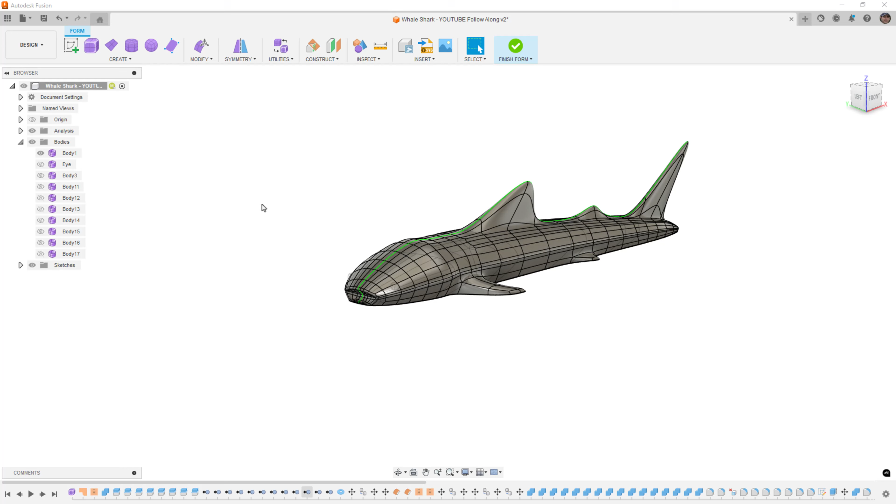The mouth, for example, is a very tricky area we're going to have to work on. We can see the way the edge flow is working here, and we're going to have to spend a lot of time on that. But let's go ahead and talk about the overall process, how we start the design, how we add a little more detail, and hopefully by the end you'll have a bit more confidence to try to model stuff like this on your own.

So first things first, we need to start a new design. We're going to start a new freeform model, and the basis of any new freeform model comes down to your choice of the primitive, or the starting shape.

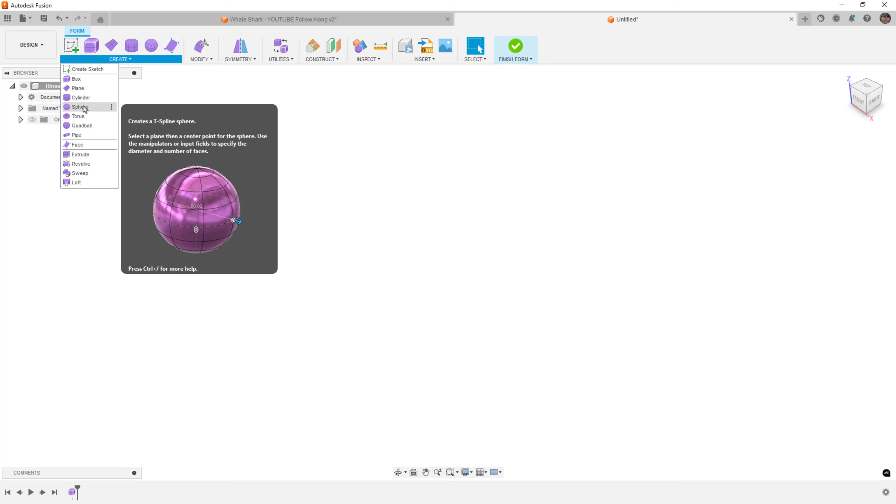In some cases we might go for a sphere, like if I'm modeling a pumpkin or an apple, because the point at the top where everything comes together isn't a big deal - it'll be covered up by a stem or something. But generally, when we have a model where all these edges converge to a single point, that's something we want to avoid unless the model really calls for it.

For something like a helmet, which we've done before, a Quadball is a great option. When we're talking about car modeling, we generally start with either a face or a plane. But for the case of the whale shark, we're going to start with a cylinder.

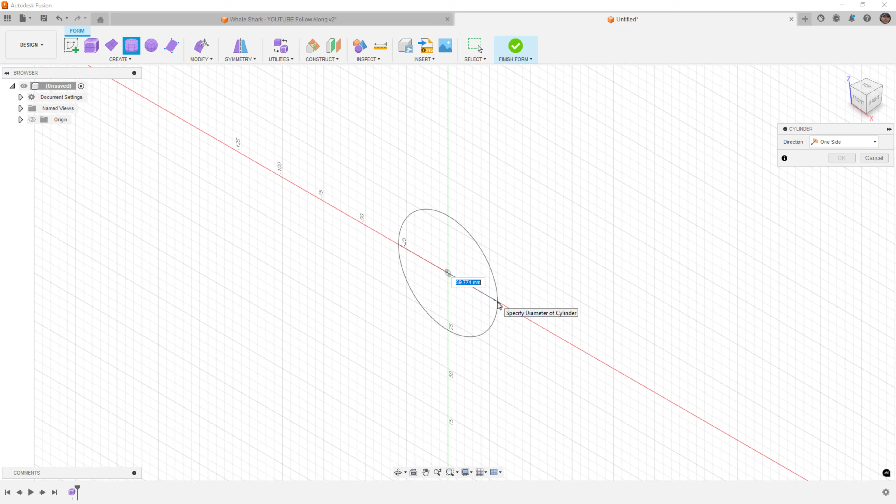So we're going to begin by sketching on the front plane and just figure out about how big you want to make this thing. I'm going to start with about 60 millimeters. I'm going to change the height faces down to 1, and I'm going to leave the diameter faces at 8 for now. We're going to say OK.

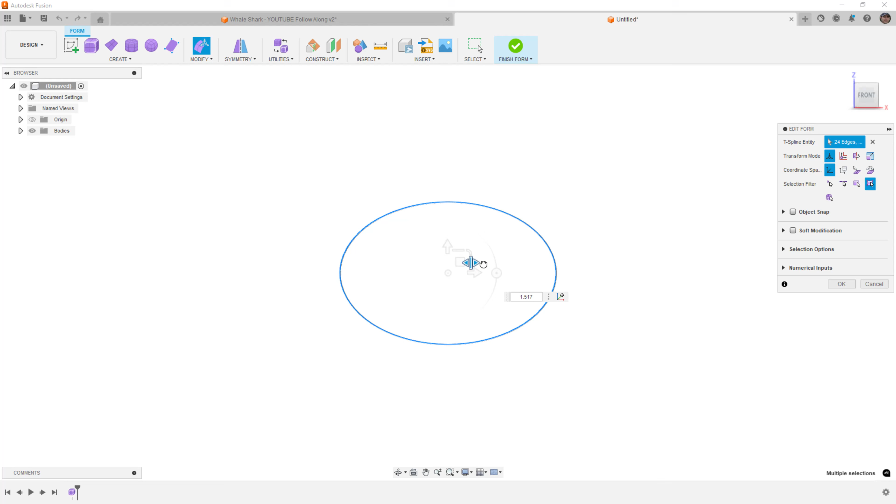From the front, I'm going to select everything, and I want to begin by scaling it outward. A whale shark is pretty wide and low, so we're going to stretch it out roughly 1.6 scale, and then we're going to say OK. So this is the basis, the starting point for us.

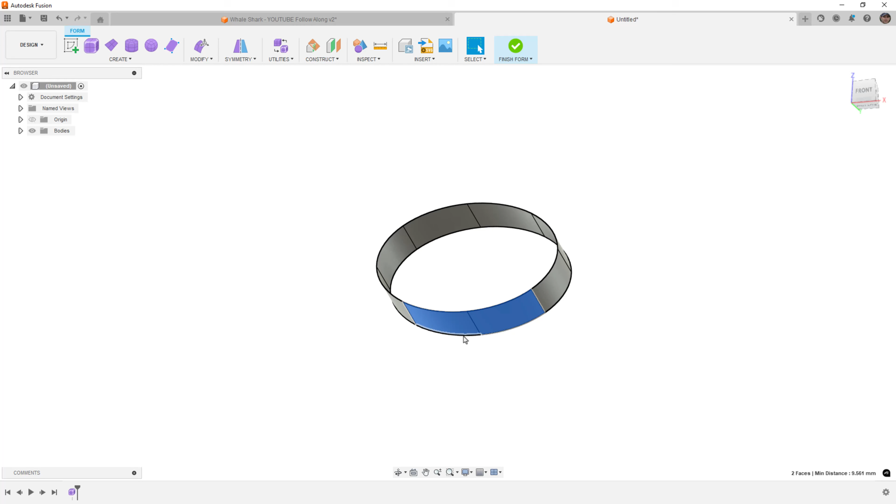Now, this design originally is intended to be 3D printed, so I needed to make sure it had a flat base. The best way to do that is to delete the number of faces you want to get rid of and then just fill it back in with something.

This can be a bridge - we can use the face tool and snap to those vertices. Bridge in our case is going to be straightforward. I just need to make sure the number of faces leaves me with one line in the middle so I can use symmetry. I'm also going to select keep creases, which will crease those edges for me, keeping that bottom flat.

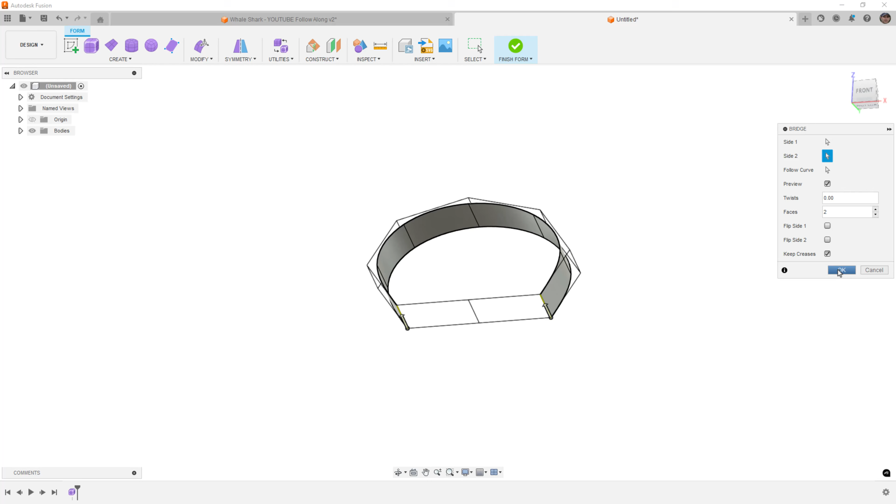Now we can add symmetry - just pick one side and then the other, and make sure we have a green line at the top and the bottom. So this is the basic shape. We're pretty much done at this point, so let's go ahead and add a little bit more detail.

I'm going to start by selecting this back edge, go to Modify, hold down Alt, and drag it all the way back wherever I think I need the tail. If you let go of Alt and press it again, it's going to add another edge for us, and that's okay. The next thing we need to do is move our pivot point.

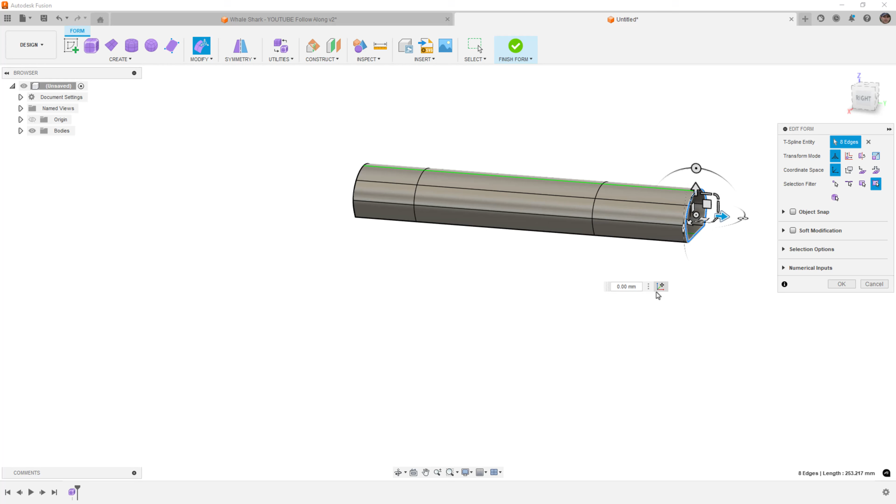So we're going to use the Move Pivot Point option, move it down to the bottom, and then we want to scale this down.

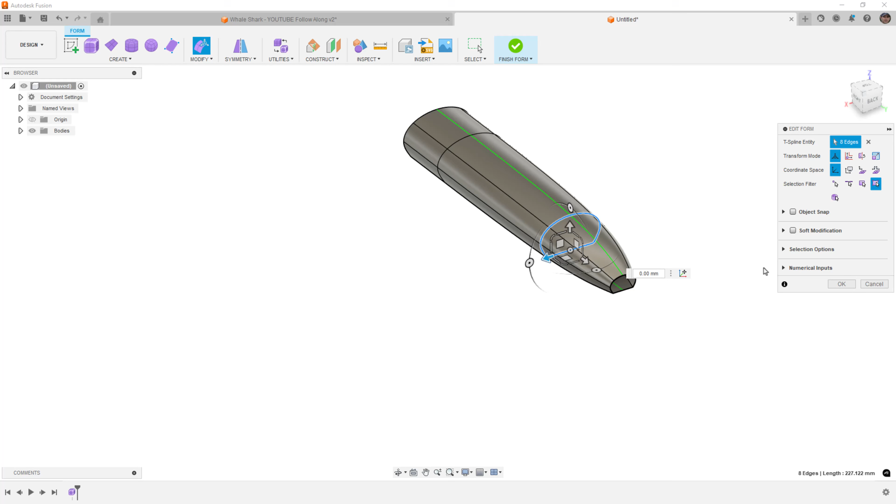So it's going to taper toward the back. Then we're going to double click on this edge and reset that pivot point. It needs to be at the bottom center. Actually, it doesn't have to be in the center. If we're only scaling vertically, it just needs to be on the bottom. If we're scaling horizontally, you want to make sure it's in the center so that both sides scale inward equally. And then we'll scale this down as well.

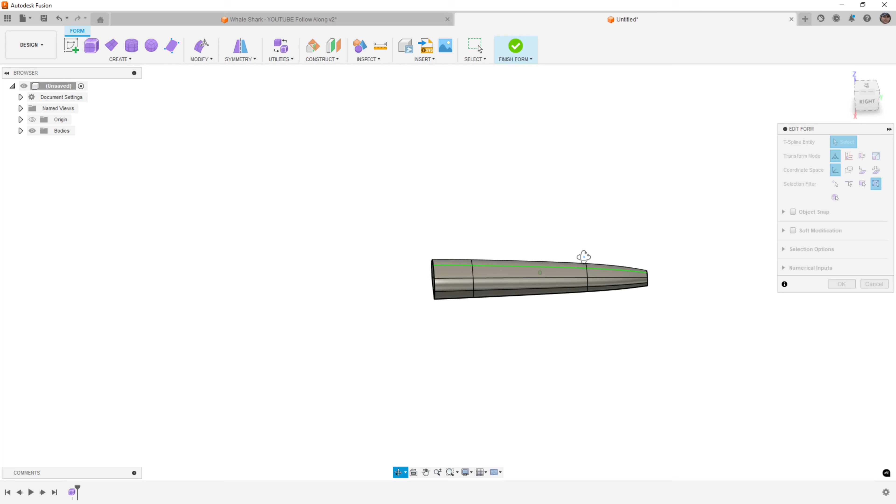We basically just want a transition of the body. If you want it to be a little bit wider, you can always play around with the scale horizontally and vertically, so take a look at the side view. If you want it to be a little bit taller, you can pull that up, but I think that looks pretty good.

Now with a whale shark, actually the head sort of goes out and then comes back in. So if we take a look at this from, let's say, a top view, you can see at this section here, which is kind of where we started, it goes out and then tapers in, and at the eyes it tapers in a bit more, or at least that's how I modeled it.

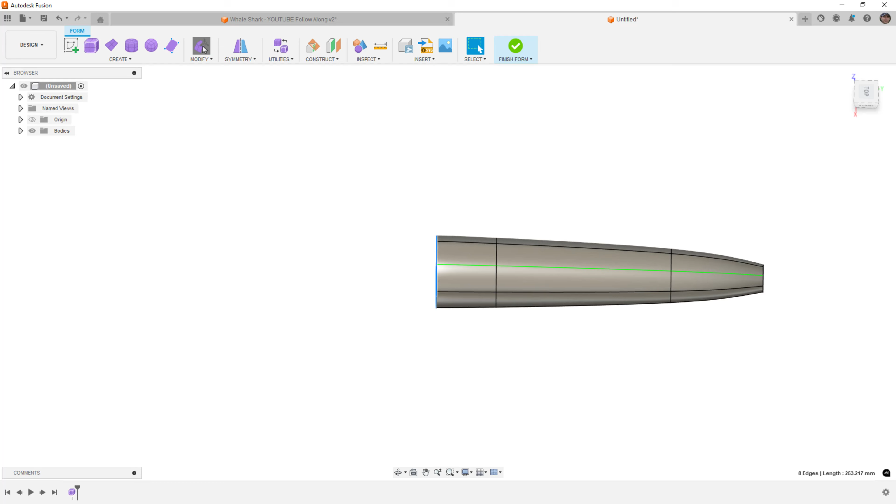So what we're going to do is start here, and we are going to reset our pivot point from the jump, so we're just going to put it down there. And from a top view, hold down Alt, pull this out. I'm going to scale it horizontally here.

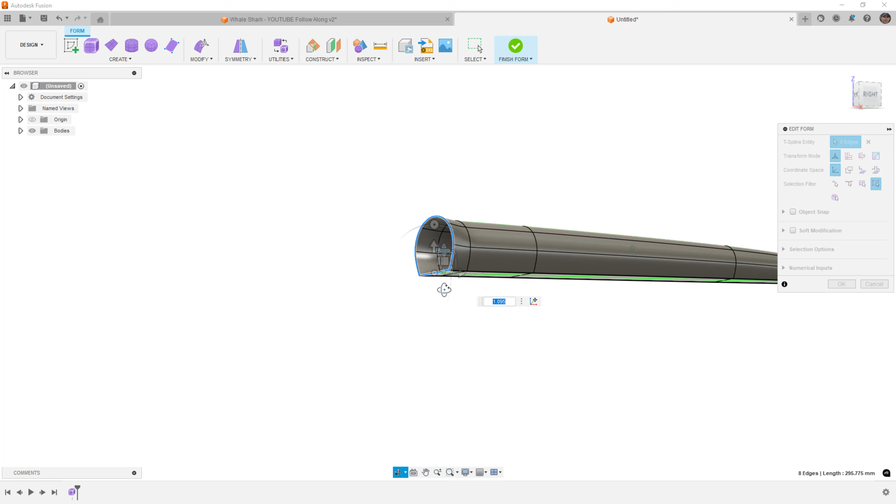And up a little bit vertically. Remember the pivot point's at the bottom, so we can do that. And then again, hold down Alt, begin to pull it forward. Alt one more time, and this time we're going to start to narrow the head here. And I need to scale it down.

So you will need to just play around. If you've got a reference image, that certainly helps, but for right now I think this works pretty well. And then this is roughly where the eyes would be. So again, Alt, and we'll taper this in a bit more here, and taper that down. We're going to worry about the mouth later.

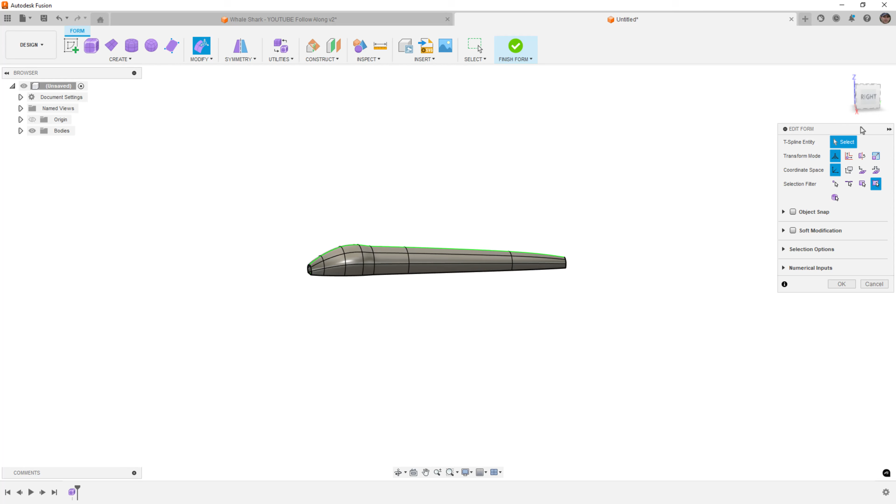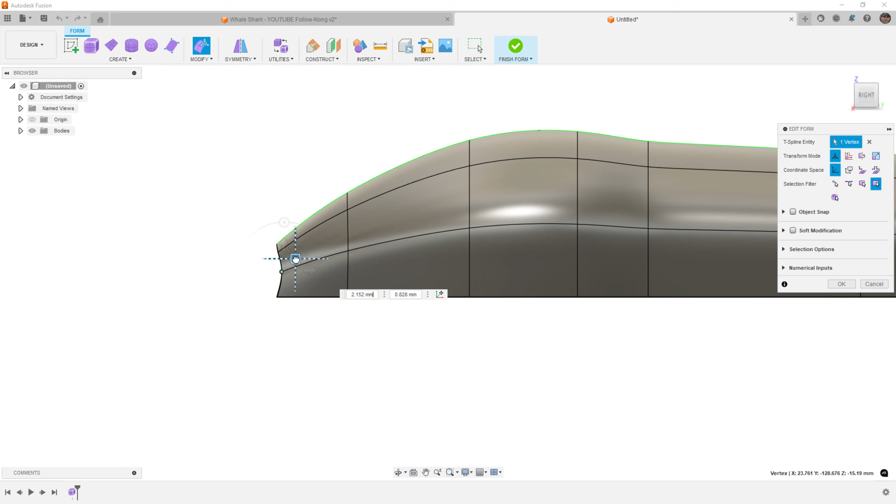So that's the basic body. The next thing we need to do at this stage is think about where we want to add details. So this is going to be roughly the corner of the mouth, this position. Before I add any more detail at this low polygon stage, I want to make any generic changes to the shape before I get too deep into subdividing and adding those levels of detail.

So if you want to, say, make a placeholder for the mouth, this is a great time to do it while we're only really dealing with 3 edges on the front. Once we start to add more edges, it becomes much more complex.

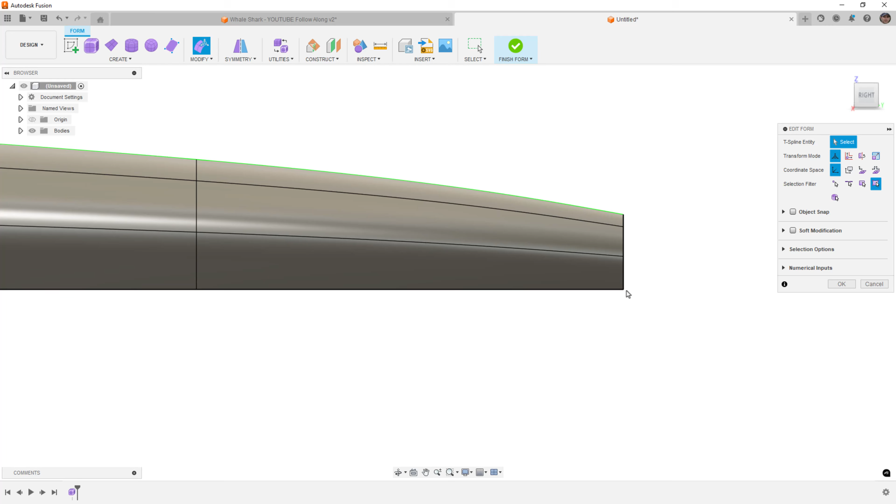Same thing on the back. If we want the back to sort of taper, this is much easier to do in box display, so Alt and 1 on the keyboard. If we want this to taper, we can play around with these edges and just get a good transition here. Alt and 3 to go back to our smooth display.

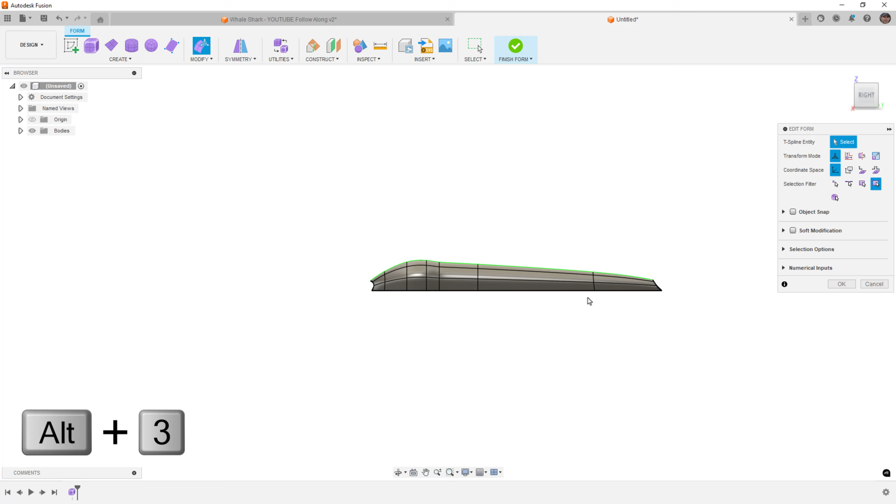So once we're happy with that, now we need to start adding a bit more in terms of subdivisions. It looks like maybe I need to grab this.

So the main reason that we need to subdivide really comes down to the fact that if we try to make a fin on the top here, we just don't have the number of edges to make it happen. Before we subdivide, we should really take a look at the overall model and think about where some of these subdivisions need to be. So for example, I'm going to start by going to Insert Edge.

I want to make sure that I'm using the exact insertion mode. In this case, I'm going to make that positive 0.5, which is going to insert an edge here. Using the exact insertion mode will keep the shape exactly the same.

I'm going to do Control Z and undo so we can see the difference here. If I go to Insert Edge and do a simple insertion mode, the shape is changing. And this is because in the box display, that edge that was inserted, the 2 lines on either side of it are still perfectly straight.

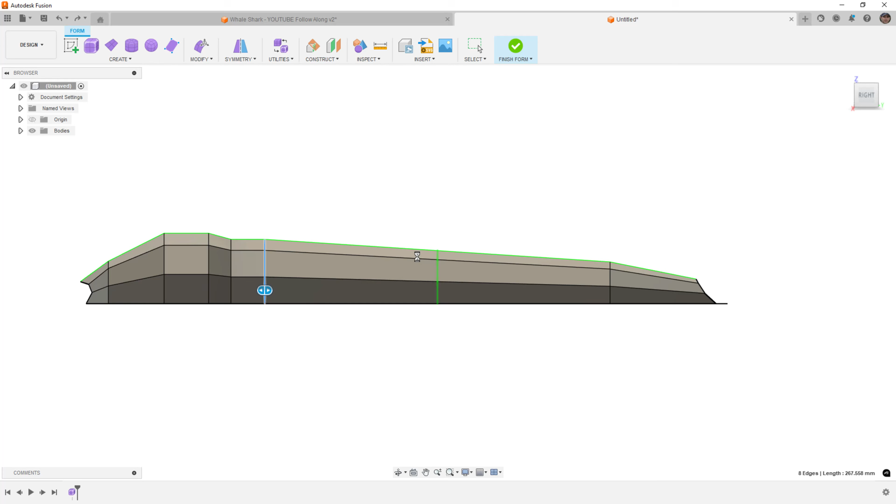So if I do Control Z to undo, and we add an inserted edge using the exact mode, what you're going to find is the angle between these edges, it's very minor depending on where we're inserting this, but it's not straight. That's the key difference here, it's going to use the exact insertion mode to maintain our smooth shape, where simple insertion mode will just slap it exactly in the middle and cut up any edges that it goes over.

So anytime we want to preserve the basic shape, make sure that we do use exact mode. The next thing we need to think about is we are going to have an extra edge when we start to add fins on the top. So I'm going to double click this edge and use Insert, Exact, but single is fine because we have symmetry. You could also use the both option, but single is fine since we have symmetry. This extra set of edges here is going to be important because once we start pulling those fins up, we don't want them to be too sharp.

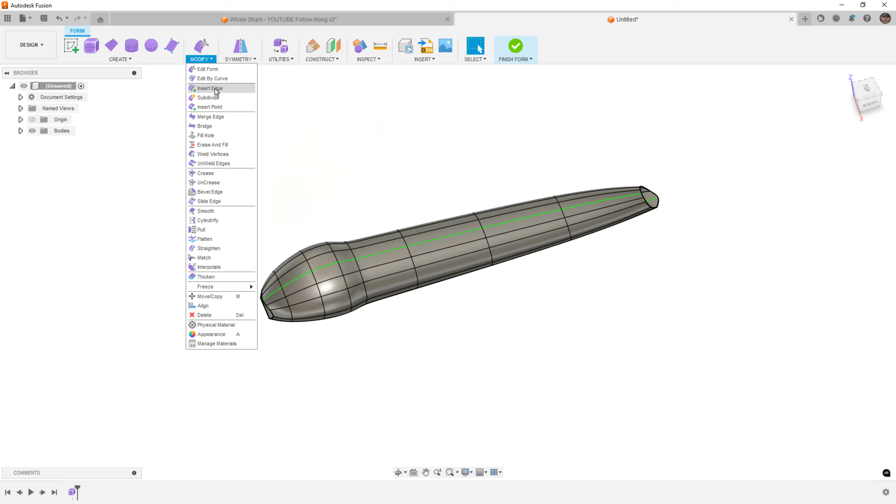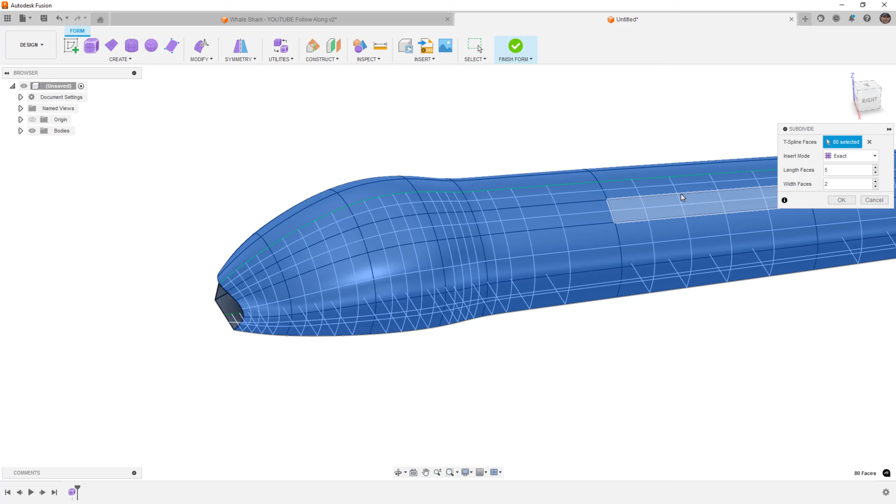It'll be too hard for us to 3D print. But now we can go to our subdivide option, box select everything, exact insertion mode, and start to think about where we need those divisions. We don't need a lot in the width faces, but we might need quite a bit in the length faces. Keep in mind that a lot of those are going to get added to the front, which could be problematic. If that's a problem, instead of selecting everything, we can just box select the areas that we need to add, and leave a low number of polygons where we don't need it.

So I'm going to say OK and allow it to just subdivide that back section. Now, this isn't the way that I did the original model, I subdivided the whole thing. But as you begin working with these forms, especially if you're trying to create organic shapes like a whale shark or some sort of animal, the fewer divisions you have, the better off you are.

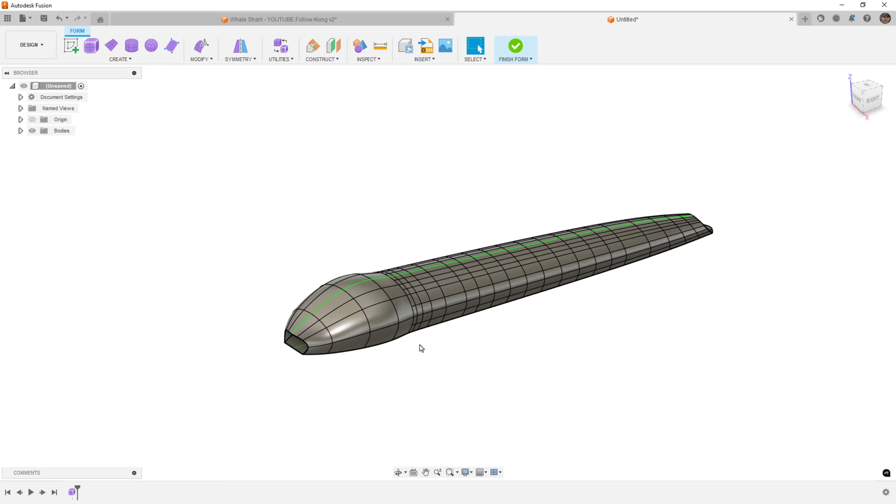Unfortunately, once we subdivide, if I come in and try to delete these edges, while that's perfectly fine, the shape is not preserved anymore. So just removing those edges is possible, but it doesn't preserve our shape.

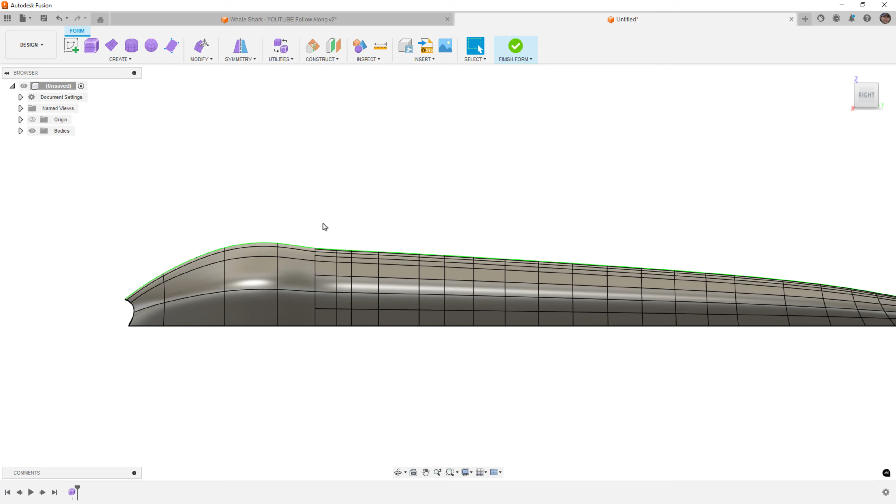So now let's go to a side view and start to add our fins. Where we add the fins is going to be important, and how we add them is important. So for this front fin here, I'm going to make sure I'm selecting the green line. I'm going to shift select, and I'm actually going to take both of these and pull that up and back. As I do this, I want to scale them inward to make it a bit tighter.

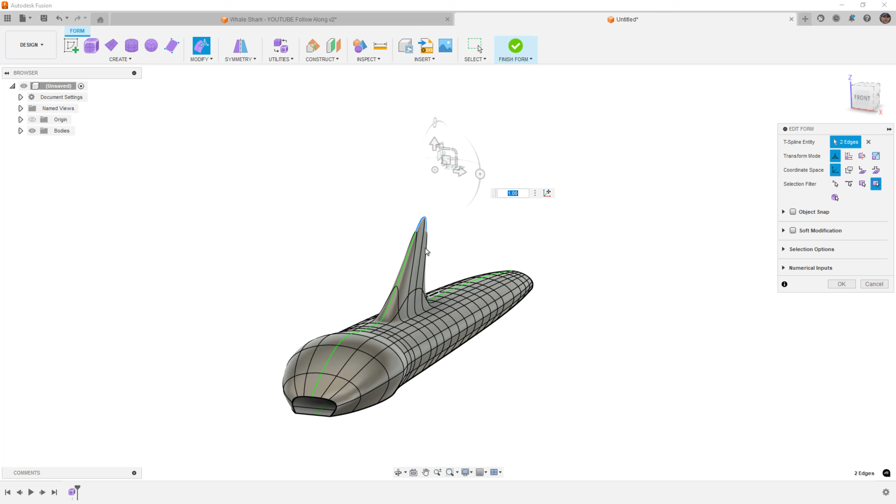And that's basically it. Now, if you find that this point is too sharp for you to 3D print, then essentially what you need is these edges need to come higher up the model, and it'll make it thicker, but you will also need to scale them inward as well.

So the best way to do that is to take them with you initially, or to use the soft modification option. So if we take them with us and pull them up, you can see that it stays wider. If we just take that center section here and turn on soft modification, we get an idea of how far that influence is going to go. In this case, it's using a circular reference.

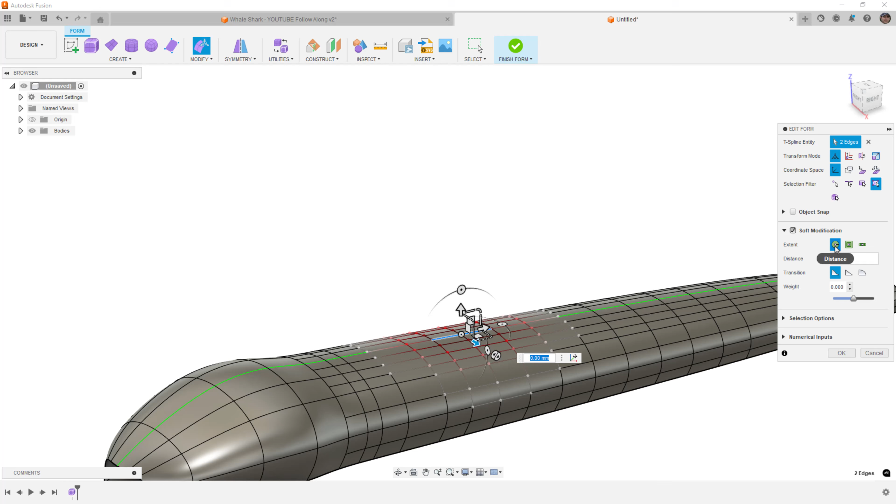We may want to use rectangular, which allows us to dictate the face count. So in this case, I'm going to go maybe 1 face in the length and maybe 2 in the width. What this means is as I pull this up, it's going to also bring some of those other references with it, and it'll keep it a bit wider.

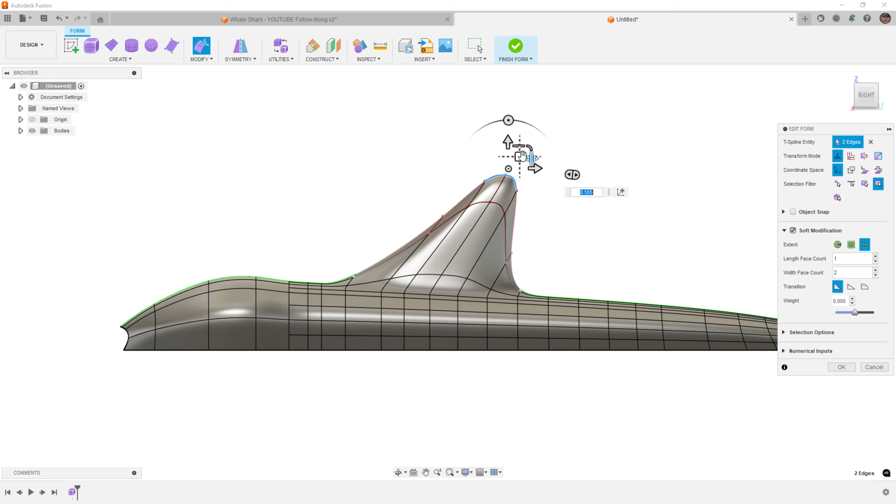You can also play around with, let's say, Control Z. You can also try just taking one edge, especially if you're using soft modification, and pull that up and scale it down to just get a feel for how it's changing the model. So I think that looks pretty good.

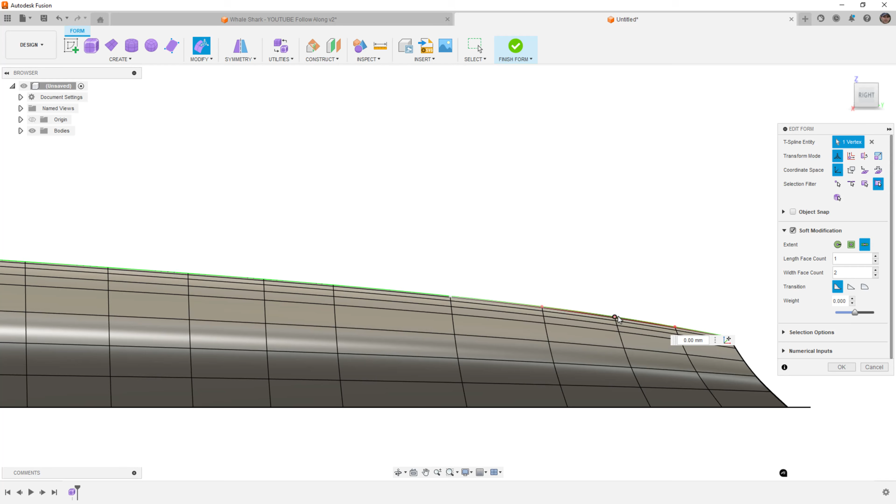We also need to do the same thing back here. We do need to be careful with how close we are to the back. So instead of taking an edge, I'm going to take that vertex there, and you can see that it's pulling here. So I'm going to have to go a bit further forward, maybe this one here, making sure it is the top one. They're kind of close together back here. And as I pull that up, looks okay.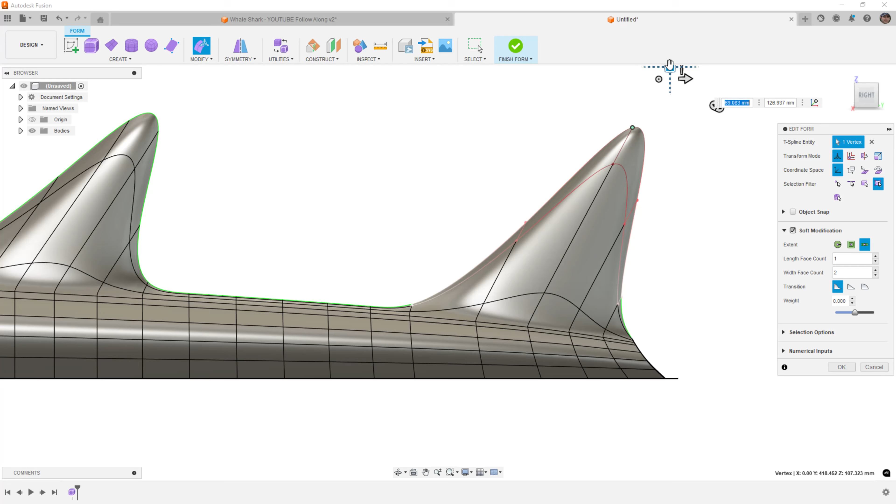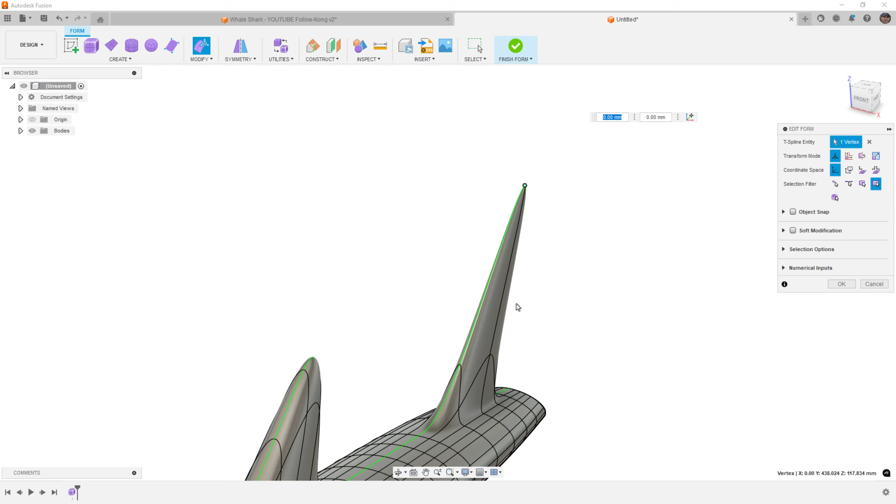If it's too wide, you can also turn off soft modification and pull it up, and it'll stay a bit more narrow. But keep in mind that the actual width, if you go to 3D print it, might be a bit narrow to print. If you view this in box display, it'll give you a better idea.

So what I'm going to do is take that one vertex on the side, manually pull it up, and then take a look at this in smooth display. That allows me to make it a bit thicker or wider there. For a 3D printed model, that's fine.

There's also another little one in the middle here, somewhere maybe around right here. Just pull that up. It's pretty minimal, but something like that.

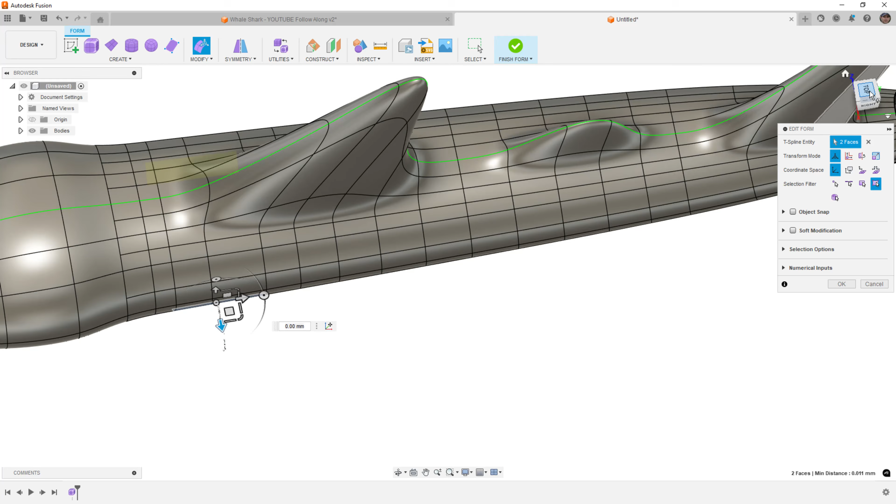All right, so that's the 3 fins on the top. Now we need to worry about the fins on the side. The way I would approach this is by extruding. So from the top, I'm going to take those 2 faces, hold down Alt, and pull them back, and scale them to narrow them. Then I also want to take these faces in a bit and scale them down a little bit.

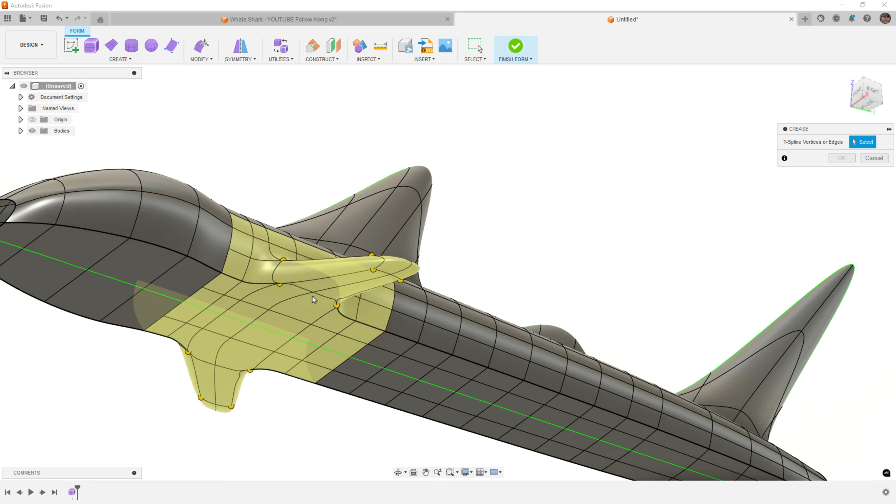After we make those, we need to come back and use Modify and Crease, because our crease now stops where we extruded, so we need to carry the crease along the bottom edge.

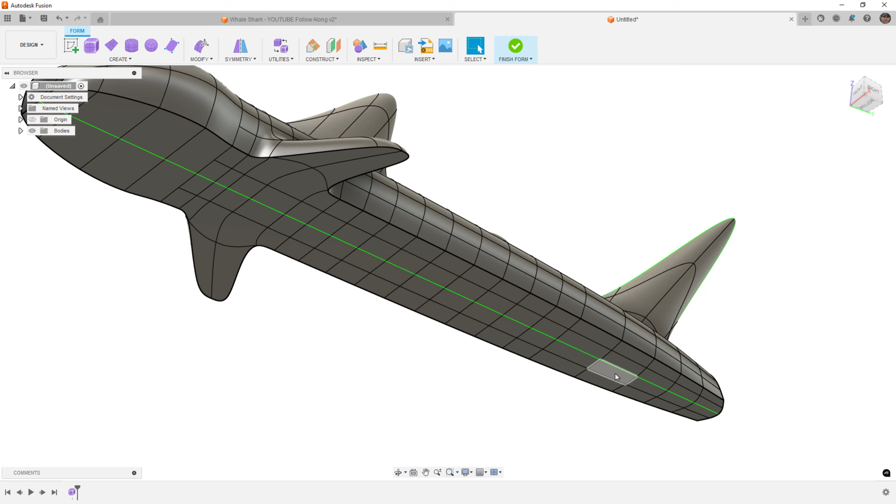Again, because the intent with the original model was to 3D print it, I want to try to maintain a flat plane with a crease at the bottom. Not only does that simplify the process of designing it, since we have a good idea as to where it is on a build plate or plane, but it also helps with adhesion. So having a bigger surface area here and not having a smooth bottom where we need a bunch of support or raft helps there.

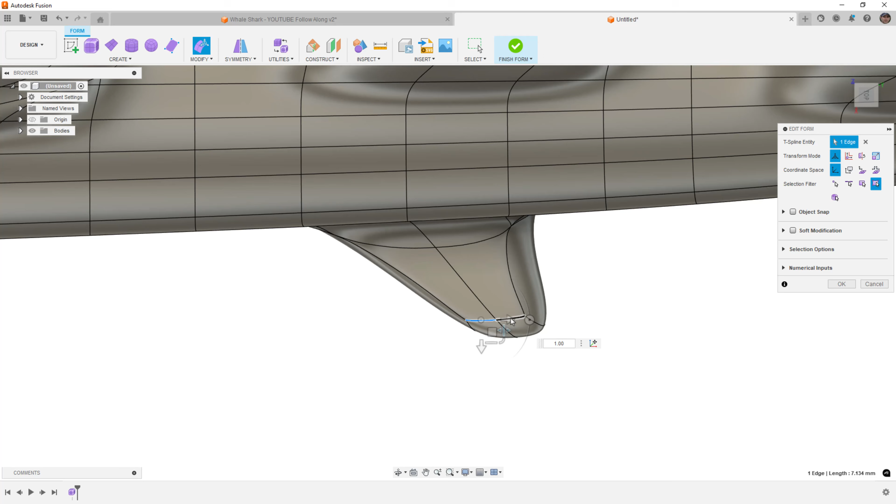The other thing is there's another set that's probably somewhere about right there. Again, top view, hold down Alt and pull that back. Same thing, we want to scale it down. Maybe take these and just pull them inward a little bit.

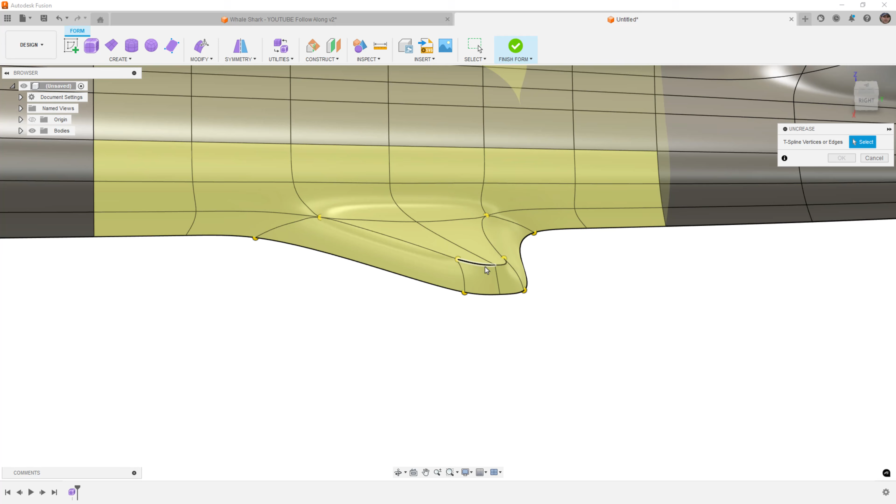And go to crease. So it looks a little bit crazy here, but once we crease, it should clean that up, hopefully. Yeah, that looks better. Looks like there's a crease on the top, so I'm going to uncrease that top—I may have accidentally had it selected. That looks okay.

So that's the basic body. The last two or three things we need to do: one is the eyes, which we'll do as a quad ball, or we could do a sphere as a B-rep after we finish the form—both are fine. But we need to finish off the mouth, and we need to finish off the back, and then we can add a bit more detail.

Now, when I say a bit more detail, the original model we 3D printed had some sort of creased or raised sections to give it a little bit more, I don't know, uniqueness. So we're going to play around with adding that, but let's go ahead and finish off the shape first.

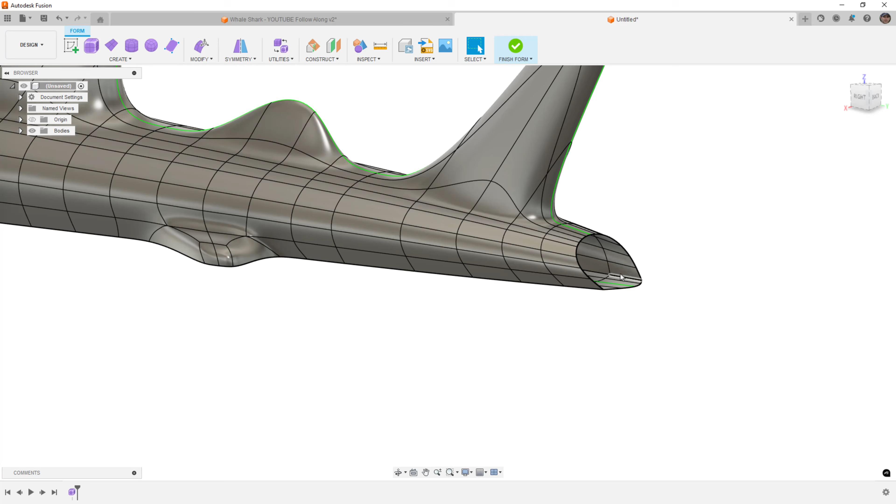A couple ways we can do this: we can try to just use Modify and Fill Hole and see what it looks like. I've found that this actually ends up being pretty nasty, especially if you use collapse. But you can use the reduced star option, and then crease these bottom edges, and in most cases that'll give us a fairly decent result.

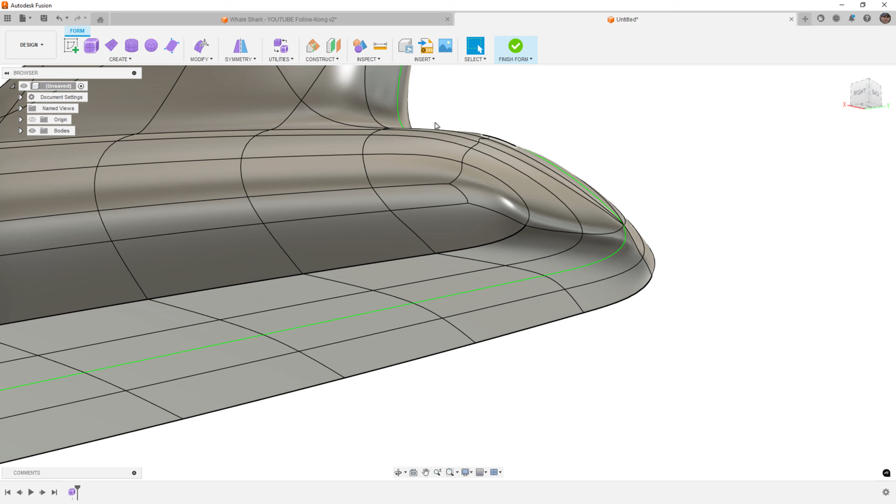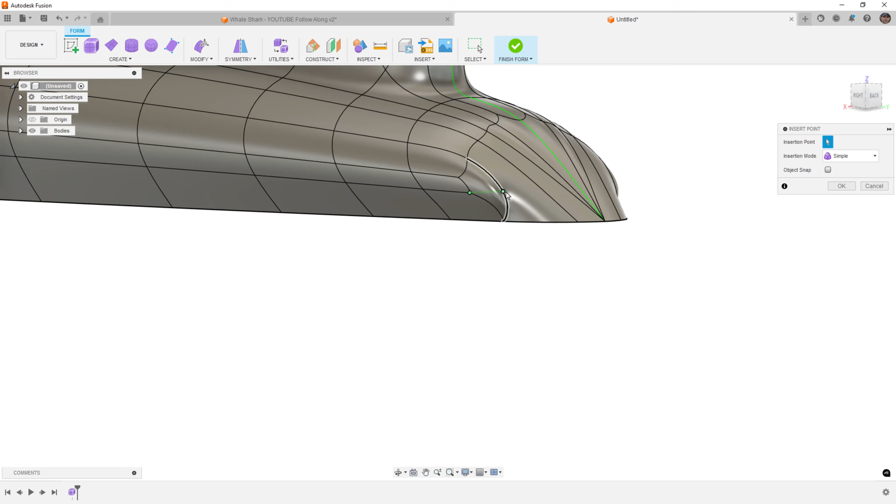If you have to do it manually, you'll end up playing around with the model quite a bit and just manually building some of those faces. Remember that we can use T-points, and we can also carry some of this geometry around. So for example, if we want to take this all the way to the midline, that'll help us push the shape out.

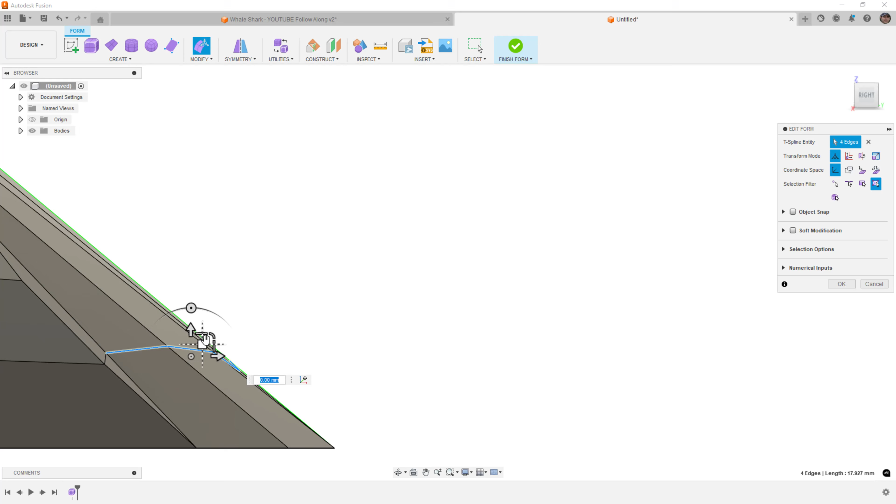Box display will help us see what's going on here. In reality, we'd probably want to pull these out a bit. So I'm going to go to a side view, pull that back a little, and scale them vertically to try to get them more in a straight line. Then let's take a look at this in smooth display.

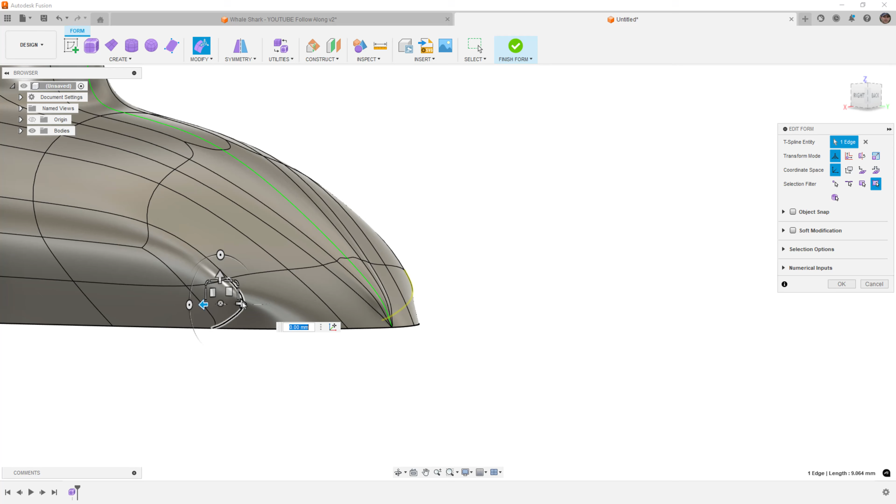Not perfect. I don't really like that bump in the middle, but probably not worth a ton of effort. I may want to get rid of this edge, just delete it and leave it like that. I think that looks okay. We can also get rid of some of these edges, for example, just selecting and deleting edges. That looks like it's okay.

Now, the next part here, the mouth, is probably the trickiest part of this whole thing. There are a couple ways to do it, but we're up against a problem because we have creases on the bottom here, and those creases are going to have an effect. So the first thing I'm going to do is double click this and go to modify.

From the front view, I'm going to hold down Alt and scale it inward. Now when I scale it inward, let's rotate this around. I scale it inward. This is going to be the starting point of the mouth. It's probably the easiest way to do it.

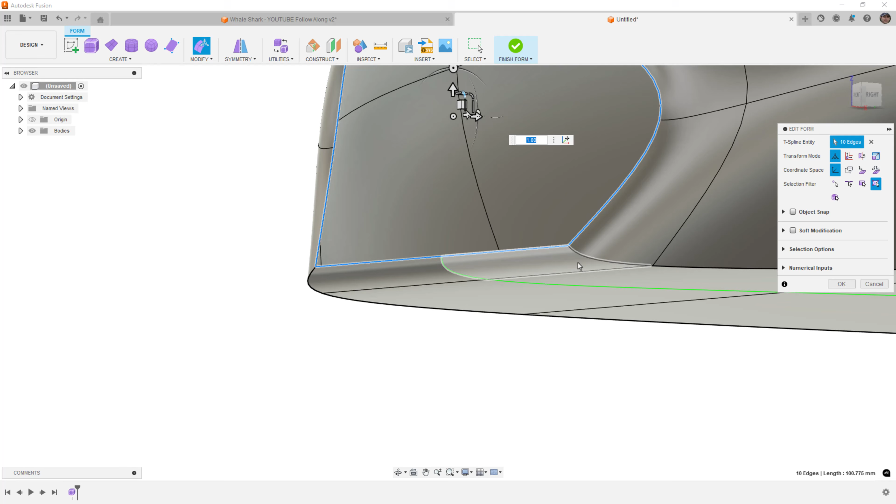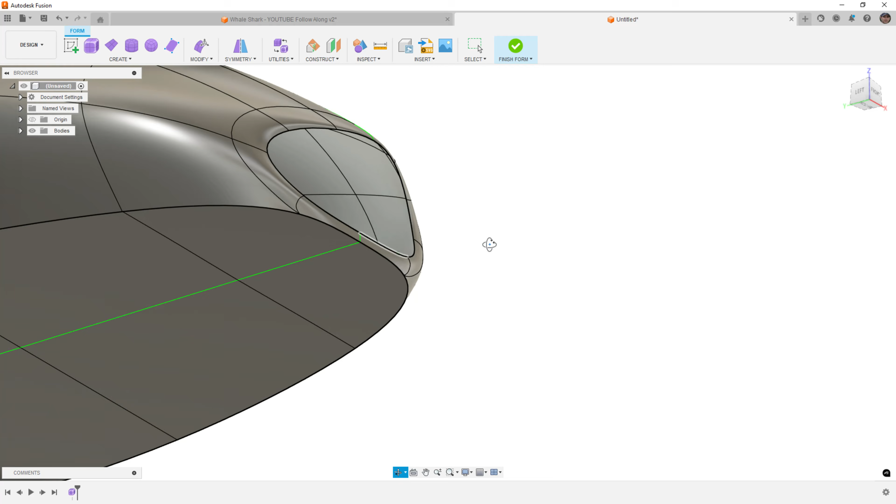But these creases, they really shouldn't be there. So what we're going to do is go to uncrease and get rid of that, and then go to crease and make sure that we're creased across there. Probably not the best thing, but if we're trying to maintain a clean edge where we're going to be 3D printing, that's the way to do it.

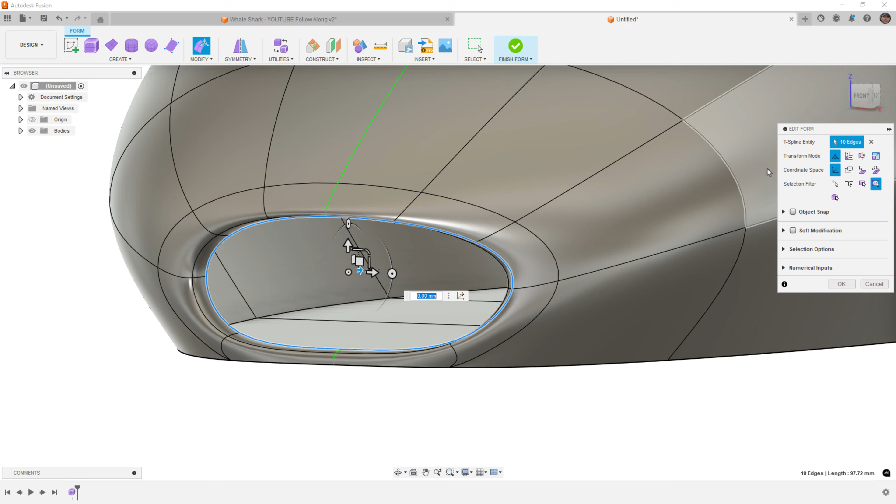So double click this edge. This time I'm going to go to a side view and do Alt and pull it backward. But before I deselect or do anything else, from a front view, I'm going to scale it down and then scale it vertically. So we're starting to build out that sort of mouth shape. I'm going to say OK.

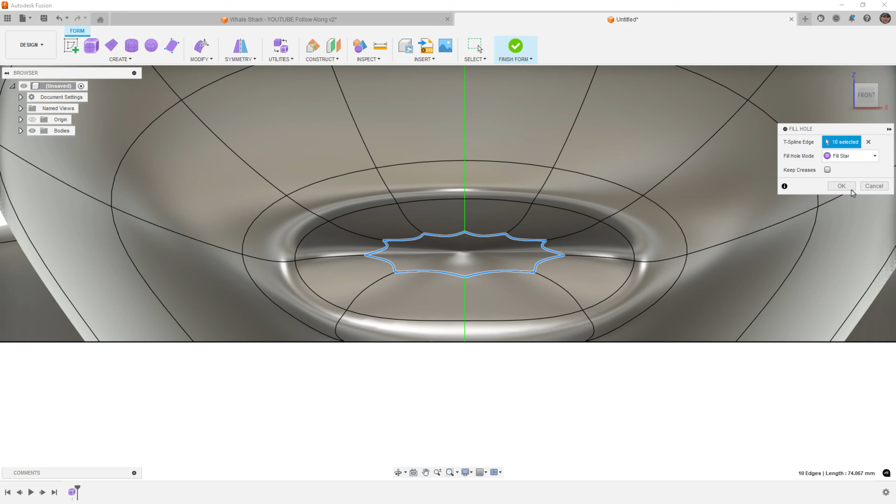At this stage with that selected, I'm going to fill hole. I'm going to try to do a fill star and say OK. Now fill star is not the final solution here, but it allows us to manually come back and figure out where we want these edges to go. So I definitely need to connect in the middle, and I probably want to connect this one to this one. That should give me a clean shape.

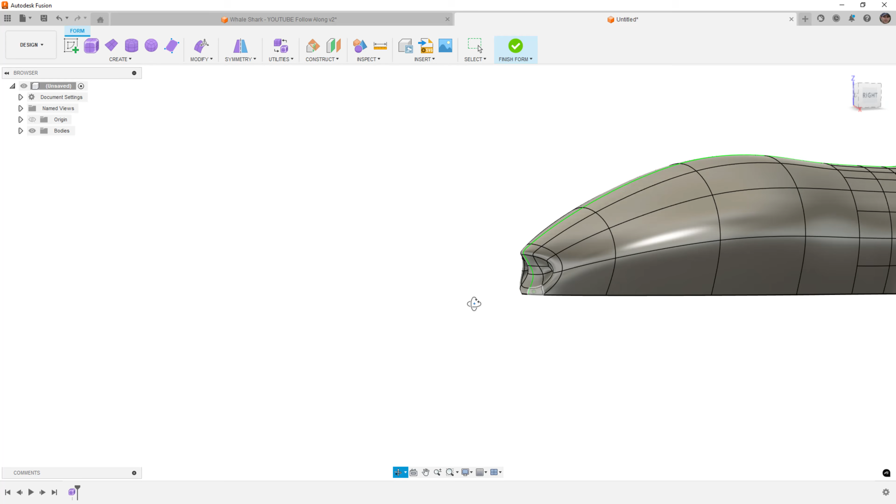So it looks pretty good. Now that we've got something here, we can play around with it a bit more. For example, we can pull this back. Let's take both of these back, pull that back a bit and give it a bit of a deeper shape. We don't want to get too crazy with detail here simply because it's trickier to print. But I think just narrowing that down, maybe taking this edge here and pulling it back, will give us a good general shape.

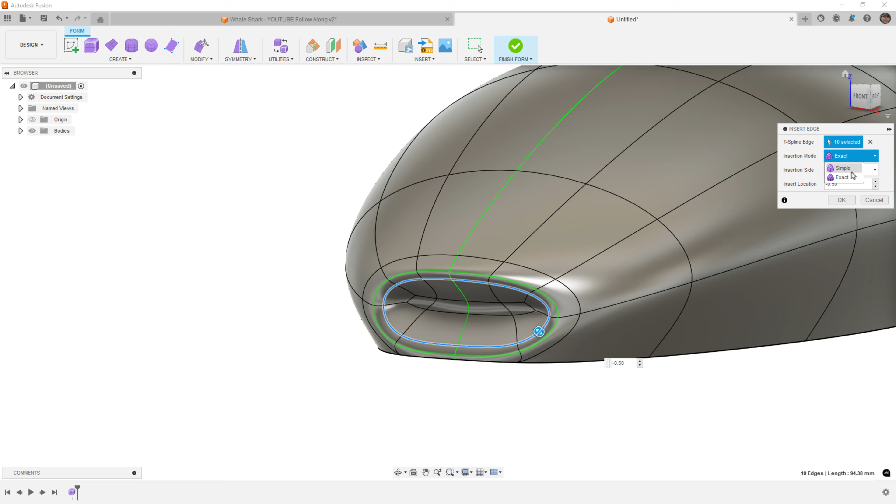You can play around adding as much or as little detail as you want. So for example, if we take this edge and say insert edge on the negative side, we'll do a simple insertion mode. That'll tighten up that transition a bit. Control and 4 gives it a bit of a tighter transition.

Really, this is where most of the time is going to be spent. Adding details like the mouth, we can do that relatively quickly, and for a 3D print you're not really going to notice much. But if you want to spend a lot of time on a realistic model, this is probably not the best software for it, honestly, if you're trying to do realistic animal models, but you could really kill a lot of time doing that. So that's the overall basic shape. Now it's time for us to add a couple of extra details.

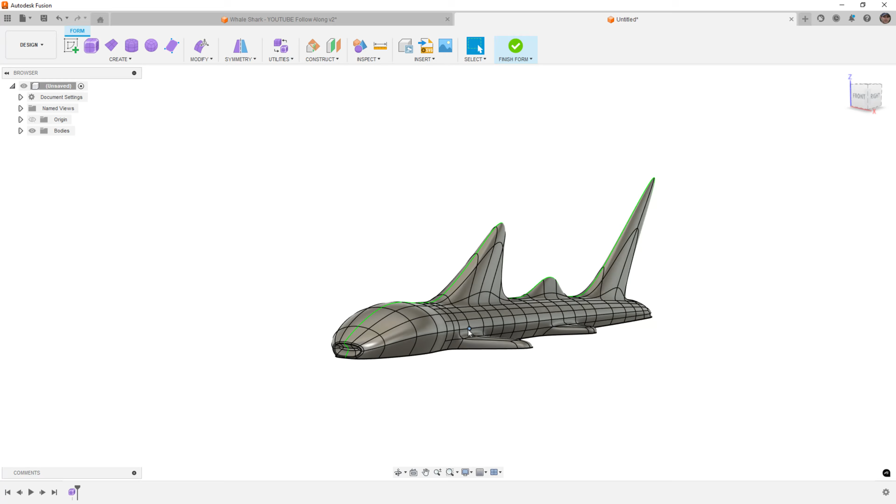And when I say extra details, what I mean is sort of those stylized lines where we've got harder edges on the side of a model. The way I'm going to do it is I'm going to start here and Control double click this edge on the back, which will allow me to select that entire edge.

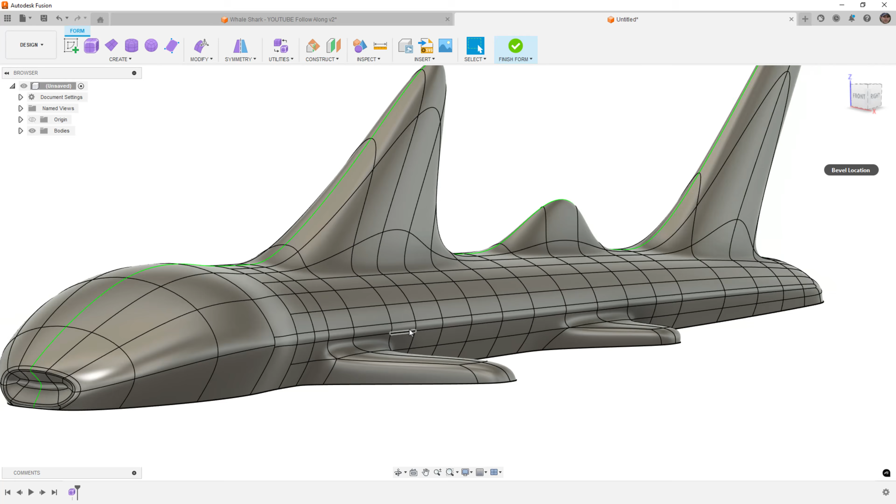And then I'm going to use my bevel tool. Bevel is a tool we've used quite a bit on car models, especially when trying to add stylized lines. I'm going to use 0.1 for the bevel location in one segment and say OK. That instantly gives us a harder transition without much extra work, and then it slowly fades away into the front.

Now, if you want to carry it all the way to the mouth, all you really need to do is select the entire edge. One thing you need to be careful with here is if we're using one edge insertion, we want to come back and weld one of these vertices back together. Having that transition where we've got 2 or 3 T-points in a very narrow area is not going to be good.

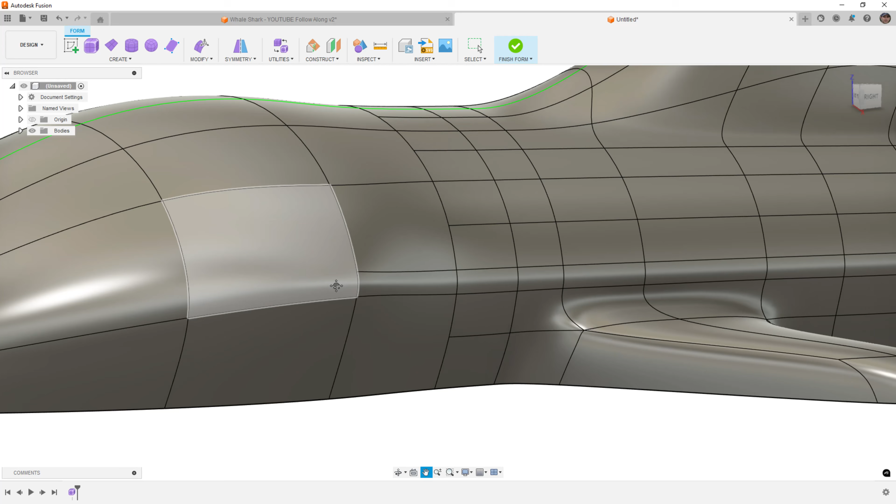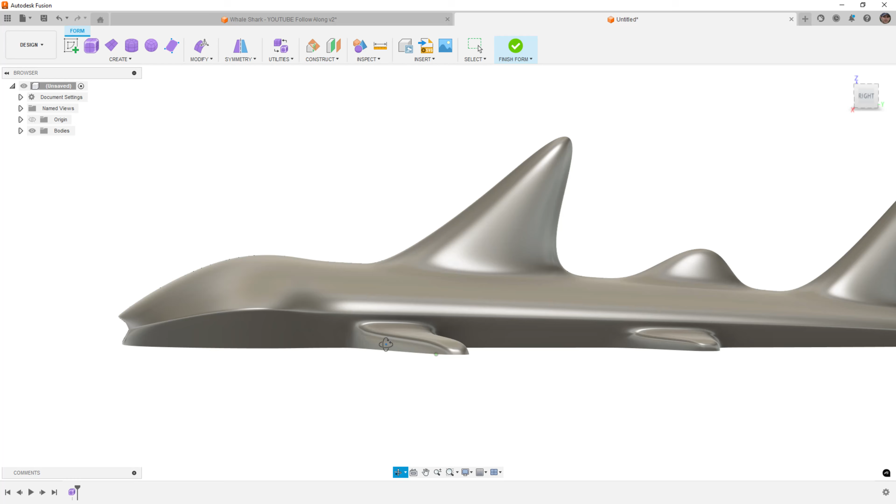If you want to transition that more forward manually, we can always use insert point, and I can carry it forward to, let's say, pretty close to here. That'll help me carry that shape forward, and you can see it goes right into the corner of the mouth there. We'd end up putting the eyes right above it. Yeah, that's one way that we can add those details.

Let's go ahead and add a few more. This time I'm going to do it to maybe here, and let's do Control double click. We're going to go to bevel, but this time we're going to insert 2 segments. The reason for that is when we insert 2 segments, it'll leave the center one there, so these will still be connected, but the ones on either side will now be added at those distances. All we need to do in this case is Control double click and manually move or modify its position.

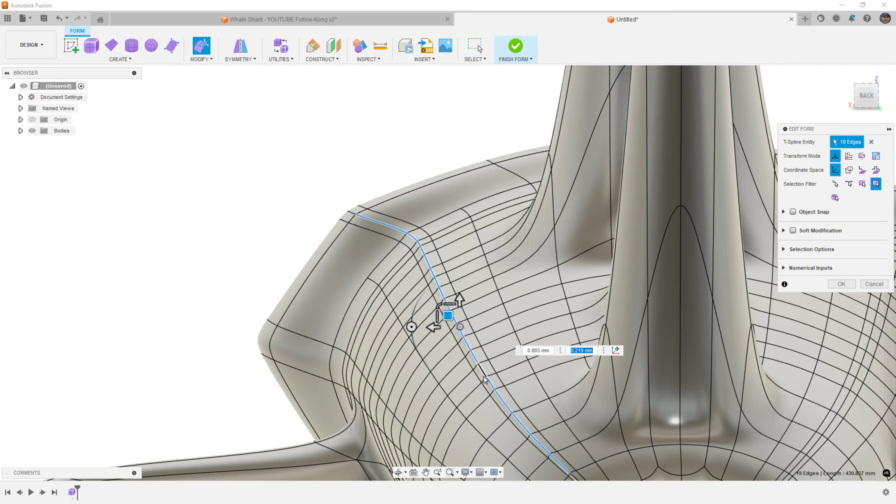So from this, I'm just going to pull it up and out slightly, and probably want to be careful with this back one, maybe manually pull that one back in, and Control and 4 to hide the edges. So again, what we're doing is just adding some stylized lines. This one is likely going to be where the eyes are.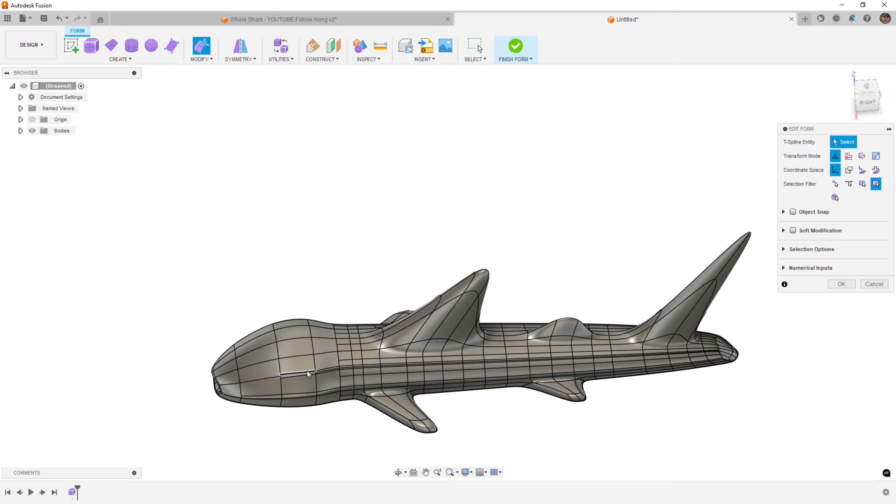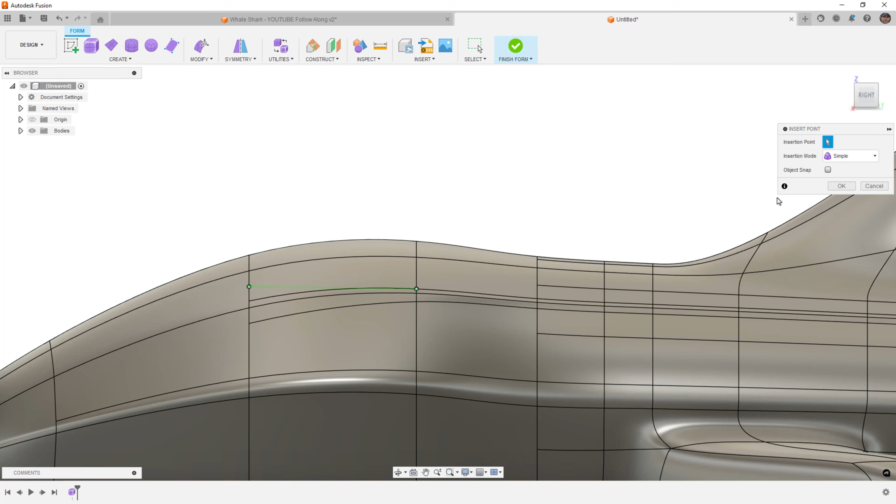So what we can do here, let's go ahead and go to a right view. What we can do here is gradually transition that away a bit more. So from here I maybe want to go a bit wider and delete that edge, and repeat the process up top. So maybe go from here a bit wider, delete that extra edge. So what we're doing here is taking that harder crease and transitioning it away so it's not so harsh. Now we've got this section where we can put the eye, with a little bit of a stylized line above it and one below it. We could carry that into the mouth as well if we wanted to.

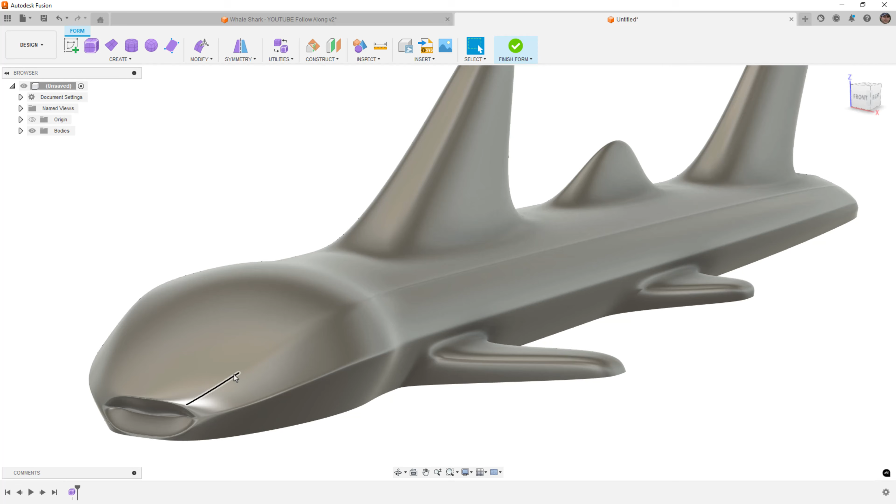Remember that when we're dealing with these shapes, if we try to transition and change direction, we're going to end up with a star point, and star points generally are going to cause problems.

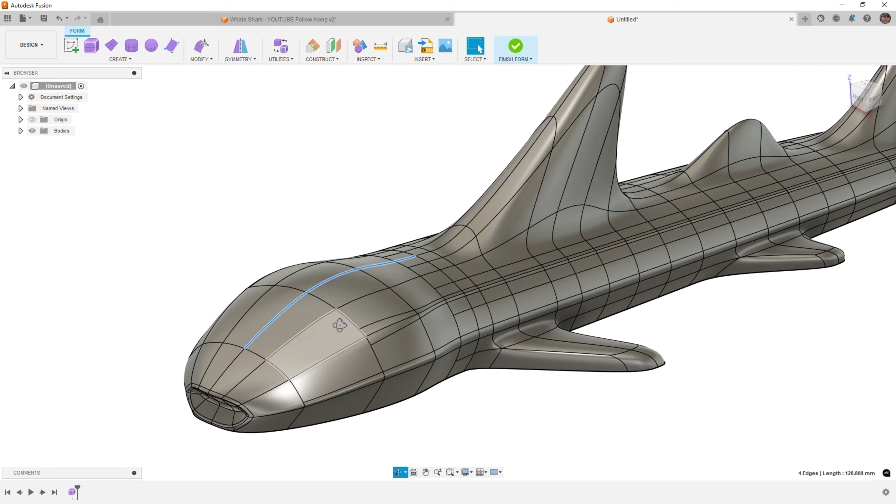The last thing I'm going to try to do is add a little bit of a ridge on the top of the head. This is not something we had on the other model, but a little bit of a ridge here. So I'm going to again use the bevel, 2 segments, so it puts one on either side. Then I'm going to take this vertex, that vertex, and this one, and we'll just pull those up, just a little bit.

And while they're selected, Control and 3 to hide my edges. So again, just adding a little bit, it kind of disappears at the front, disappears by the time we get to the fin. We could carry it onto the fin if we wanted to, but it just adds an extra little bit. Now, if you wanted to carry that all the way through, we can certainly do that.

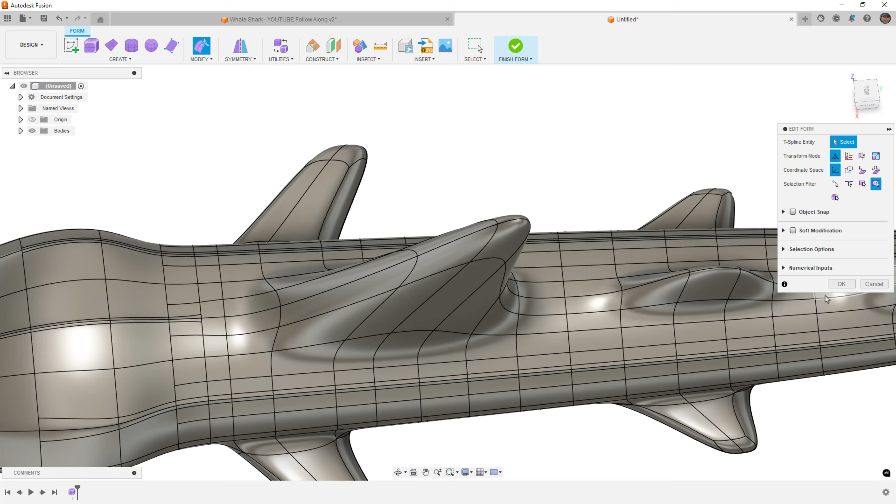We can add more edges, but for right now, I think you hopefully get the idea or the point in the way that we did this. So once again, for the eyes,

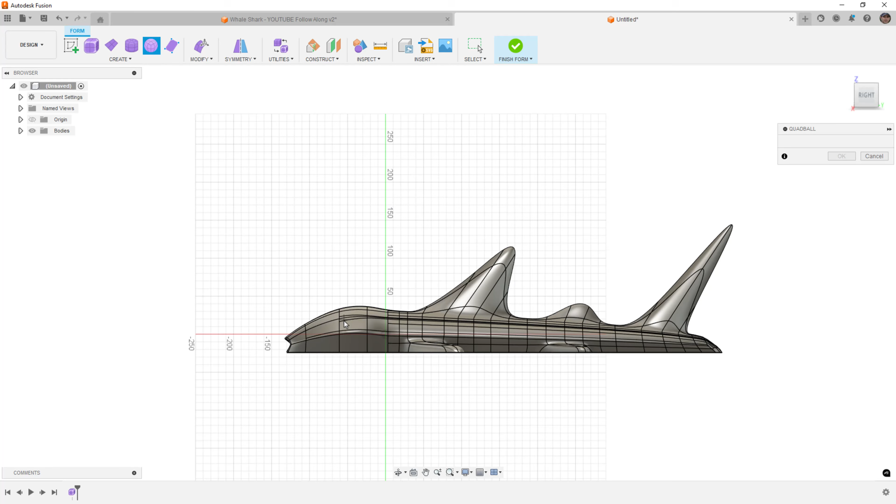We can add them now as freeform models, or we can just do them as a BREP primitive sphere. The reason you would want to do them now really comes down to whether or not you want to deform it. So if I do a quad ball here, and it's inside so I can't really see it, but I can scale it if I need to.

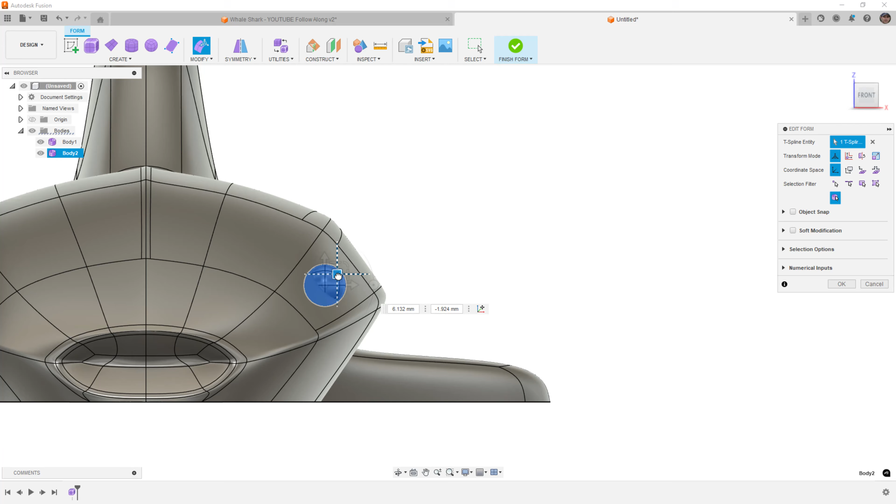So let's take this. That's way too big. And let's move it into position. We're going to scale it with the center option, scale it way down, and sort of stick it there. We'll go to a top view, figure out where that needs to go.

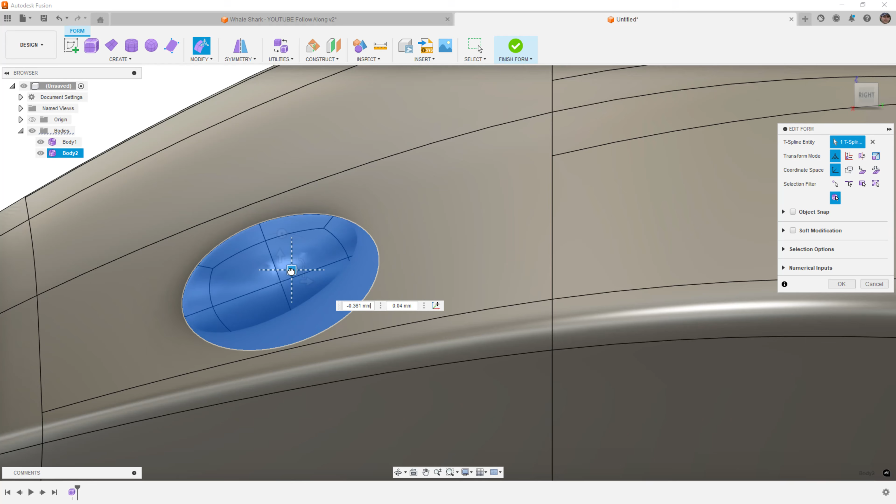So again, the reason you would do this as a quad ball or something in the primitive space is if you wanted to stretch it out a bit more and figure out a non-spherical shape for this eye. So let's go to a top view. Sorry, I know the zooming in and out sucks, but it's kind of how we have to work. So there, if we wanted it to be a little bit more ovalized like that, if you want to bug it out a bit more, you can.

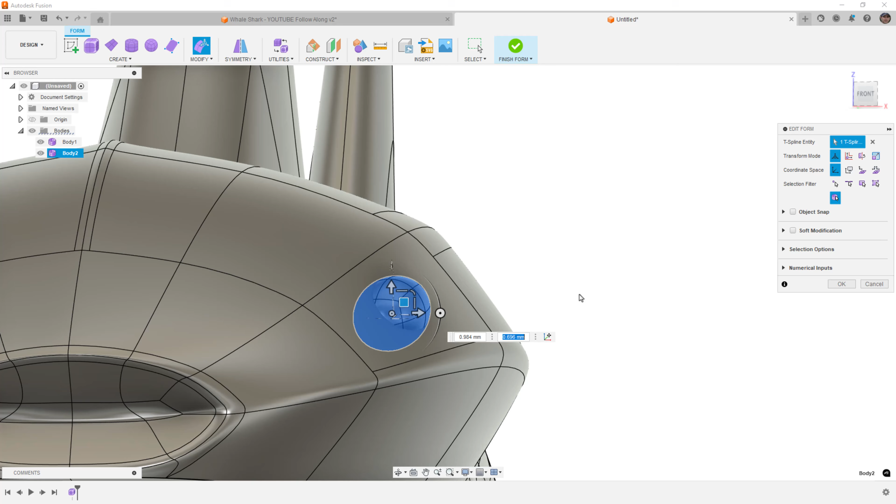And then all we need to do is go to symmetry and do mirror duplicate. Then we'll pick our mirror plane, which in this case will be that. It's only going to treat it like a single solid body, but when we finish the form, we should have 3 solid bodies and we can just combine them all together. So the main body, and then just add those eyes to it.

So that's it. The reason I didn't do this originally is because even though it's not a ton of work, it is still enough work that it's tricky to follow along with. Playing around with forms, especially for organic shapes, can take quite a bit of time, but it's applicable for pretty much any shape. We're going to do a couple more of these videos where we talk about creating complex shapes with forms.

But basically what you want to do is think about the base shape, the starting shape—in this case, the cylinder—and work with a low polygon or low face count model for as long as possible to get the basic shape. Then we subdivide it with the exact option and get to the point where we could start to add those extra details.

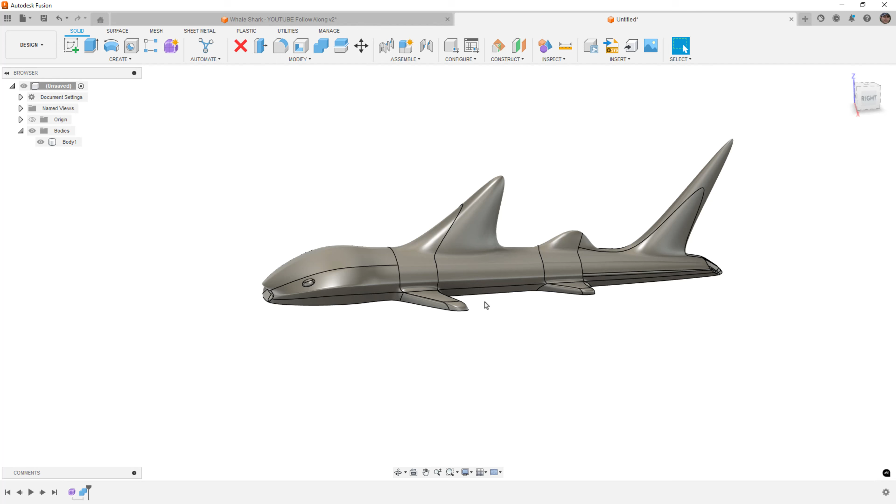Just like the other one we did here, you could then go through and add all the extra freeform features and cut the model up, then add the print-in-place articulating features—basically the same thing. Obviously there are some differences in these two models because I didn't exactly copy this, I just kind of followed the same workflow.

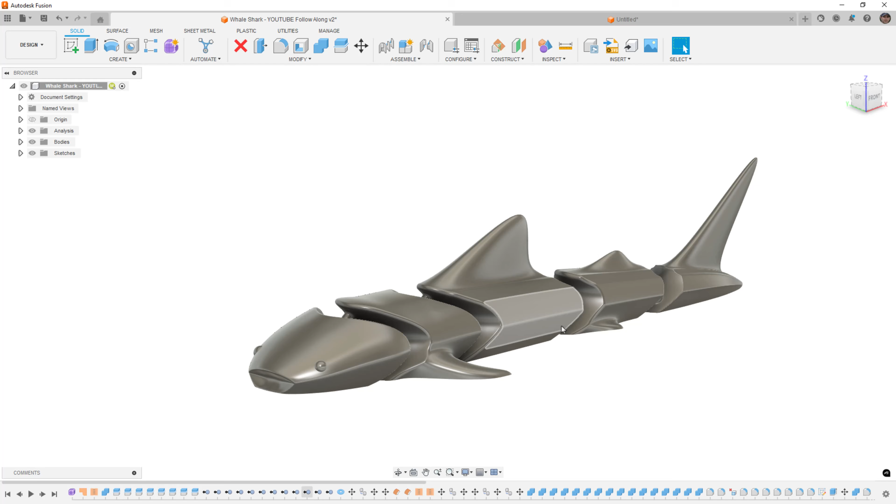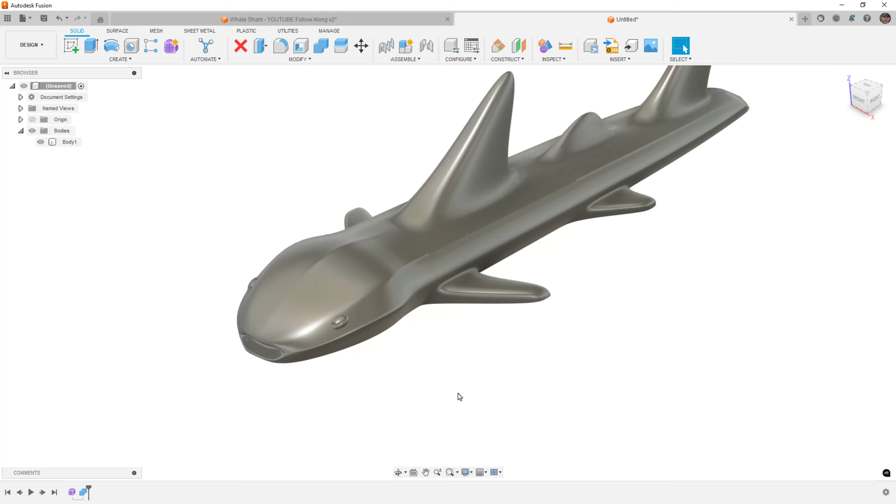But you can see that this one had that sort of stylized edge here. There were another 2 stylized edges on either side of those fins. I didn't do that in the one we just did, and I left the head shape pretty smooth on that one. Whereas this one, we've got that sort of ridge feature on the center, and we didn't carry those extra edges around. But certainly something you can continue to play around with.

Hopefully this gives you a little bit more confidence on trying to make your own shapes. Just make sure that you take the time and never worry about undoing your work or scrapping it and starting over. That is a big part of it, especially with freeform modeling.

No matter how much experience you have, you're going to run into problems and have to work around them. Sometimes the workaround is starting over. Sometimes you can delete edges and add new edges and get around it. But following the basic process—figuring out the starting shape, then working slowly with a low number of faces before adding more detail—that's going to be universal across the board.